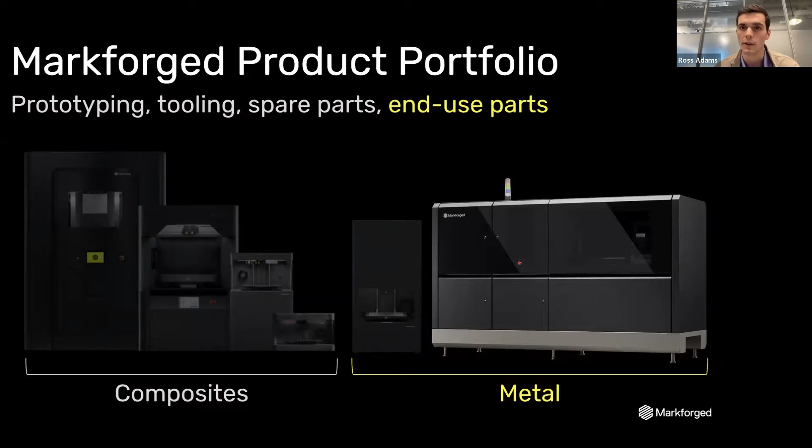So if you're familiar with Markforged, you probably have some awareness of our product portfolio, really well integrated into the FFF segment of the market. What I love about our portfolio is we've really spanned the 4 key application categories: prototyping, tooling, spare parts, and ultimately end-use parts. What we're really going to focus on today is the metal binder jetting segment, the PX100. This was an acquisition we did in August of 2022 from the Swedish company Digital Metal, and we are integrating this company into our portfolio, really targeting that end-use market segment for additive manufacturing.

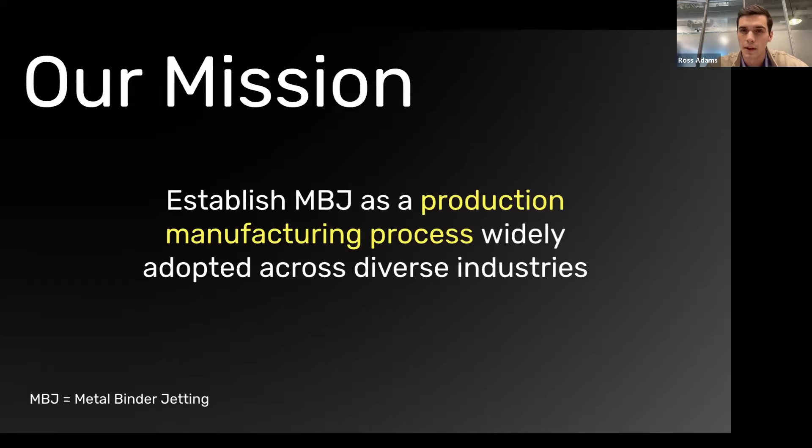So above all else, my mission for this project is to establish metal binder jetting as a production manufacturing process, and to do so having it widely adopted across diverse industries. If we take a step back and achieve this goal, we'll be very proud of what we've done for the 3D printing industry and ultimately for the whole manufacturing industry. We've got to make meaningful impacts and make it a production manufacturing process. This is what we're laser focused on.

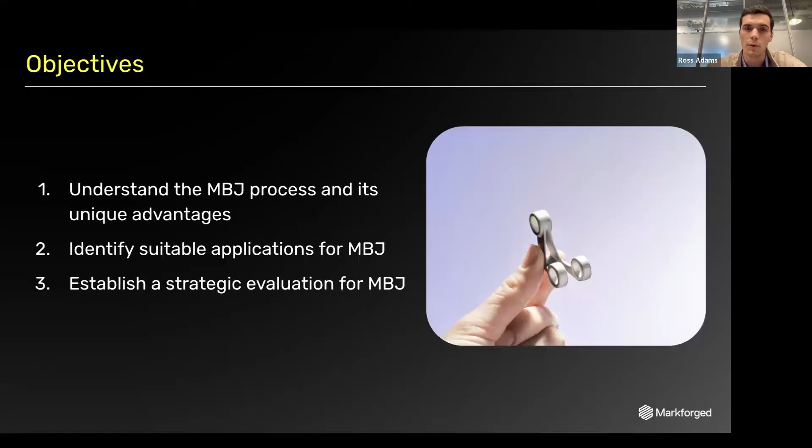So there are 3 key objectives for today's webinar. First is to educate you on what the metal binder jetting process is, how it works, and what the unique advantages of this manufacturing process are. Second is to help you identify what suitable applications are for metal binder jetting based on some characteristics and parameters that we feel are the right fit for the sweet spot. And lastly, we want to put you on a strategic evaluation path: where do you start, how do you evaluate it, and how do you de-risk your investment to make the most value out of this unique manufacturing process? So that's what we've got in store for today.

So why don't we start with the process overview? How does binder jetting work? What better way to do that than sharing this video, Cody, talking through. So what is binder jetting?

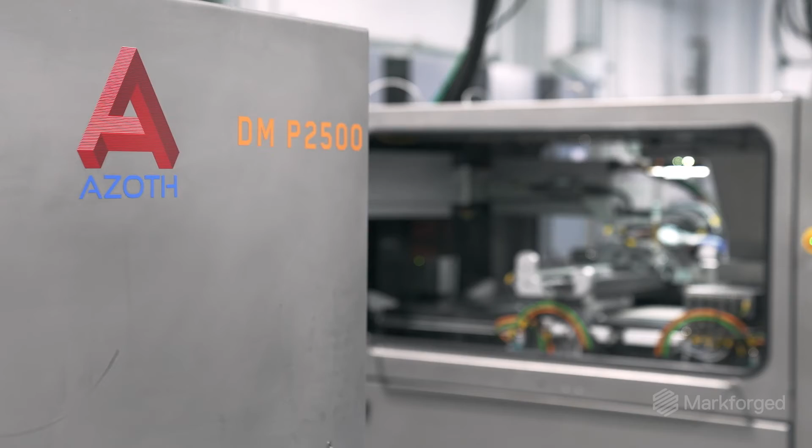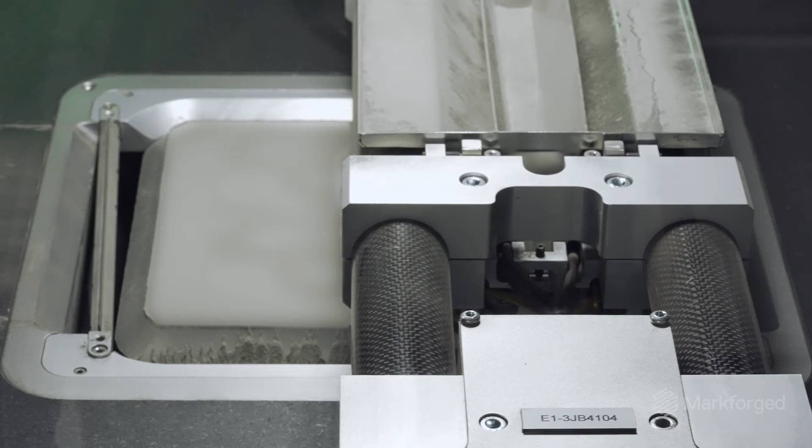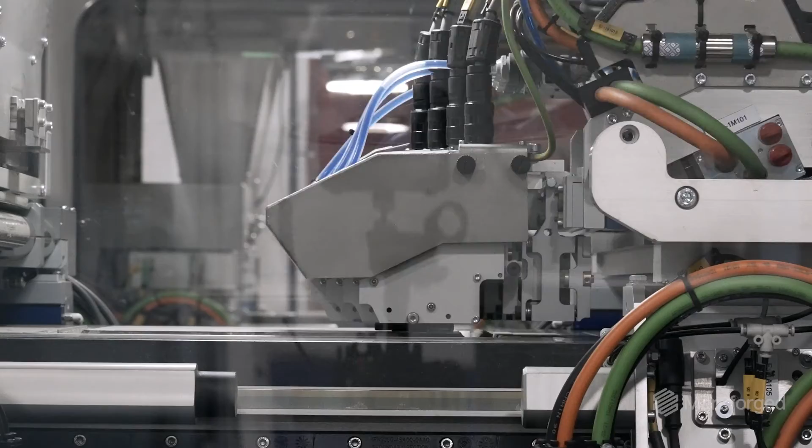The way it works is you're going to lay a layer of powder, in this case roughly 42 microns thick. Then after you lay that layer of powder, you selectively deposit binder in the cross section of your parts, and we'll continue that over and over until we build up the entire Z height of the components.

Once we've printed, we'll go through a curing step, which heat activates the binder. Basically, it locks all the metal powder into place. After that, we'll go through a depowdering step.

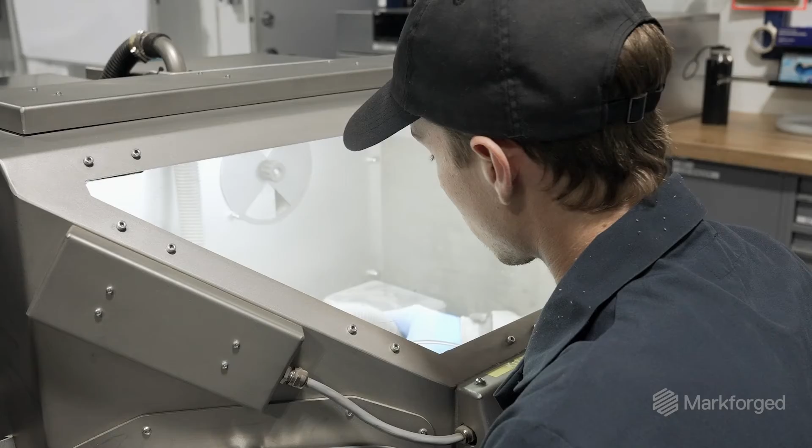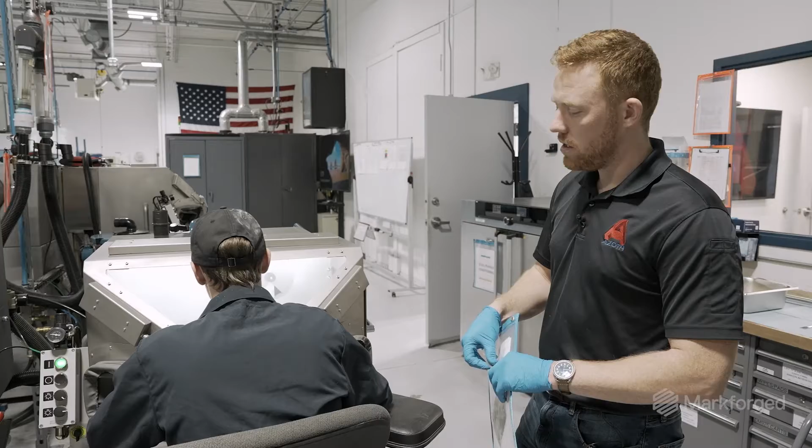So we can check that out over here. During depowdering, we're gonna blow off all the loose powder on the components, then we vacuum that up to be recycled and reused in future prints. And when they're done with depowdering, it reveals a green geometry, which is about 20% oversized in every direction.

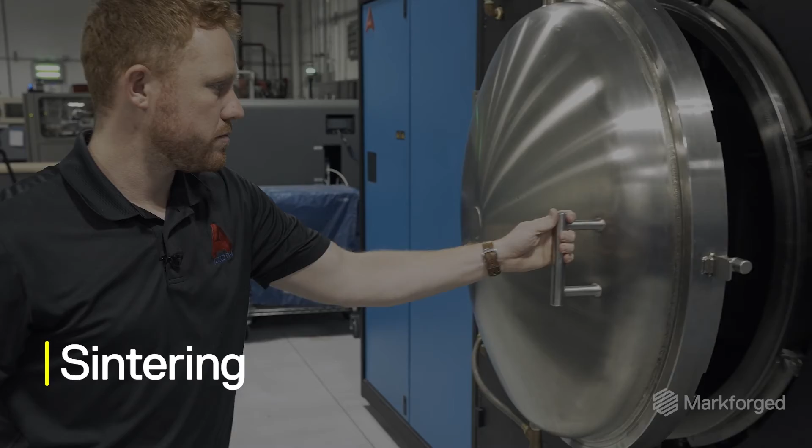We can then take that to the furnace for sintering. Sintering is a thermal process where basically we heat the parts up to just below their melting temperature. The parts will actually densify in every direction, and out comes a fully dense metal part.

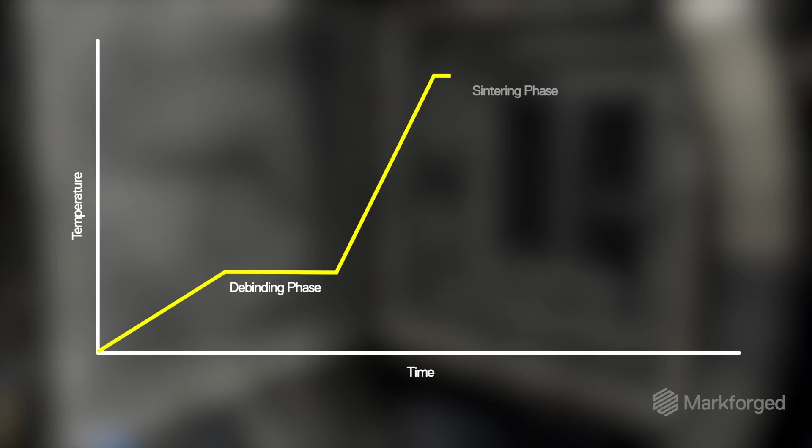It's about a 20-hour cycle. The first segment, we remove the binders from the part. The next segment, we ramp up to near top temperature and hold for a prescribed amount of time. The parts will shrink roughly 20% in each direction, and then we'll cool down.

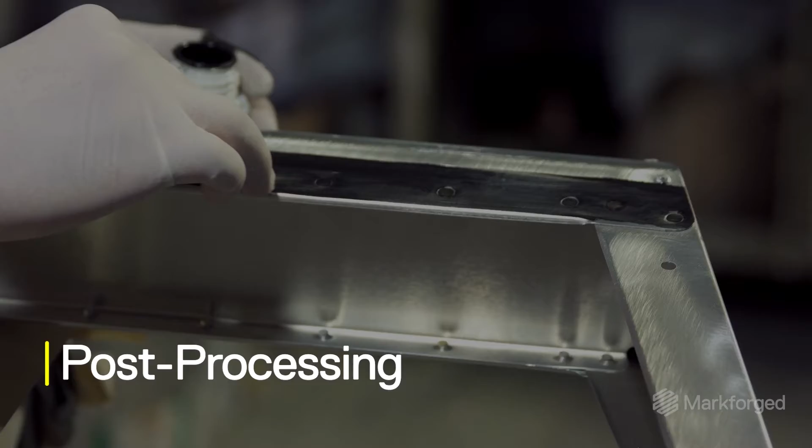At that point, the parts are ready for their next operation. A lot will ship as is, but some of them will go out for post-heat treatments. Some of them will go out for different surface coatings like chrome plating or PVD coating or Cerakoting, and some of the parts will go on to polishing.

Hopefully that gives you a brief overview of how this process works. It's really simplified in the steps of print, depowder, and sinter.

We're standing on the shoulders of a lot of science that's been established with metal injection molding and sintering. And what Markforged is very focused on is building the best printer in the world, putting the best green part into that furnace, establishing the best quality, and getting the outcomes of parts that you can put into production.

We're very proud of this machine. We focus very heavily on the precision machine design, and we believe the tenets here are quality, reliability, and repeatability, the things that you absolutely need in order to go into production and do so in a way that you can launch products and keep the printers running with maximum uptime.

This thing's built around a granite base, linear motors, air bearings. Granite base is very important because it keeps it very heavy and dampened to the forces of vibration. It keeps that powder bed very uniform across its density.

Linear motors, this is a decision rather than using stepper motors and belts and pulleys to translate rotary motions to linear motions. It's how we get really good quality on our parts and have positional accuracy of 1 micron tolerance.

And then air bearings, this is very low wear, very low friction, but more importantly, when we talk about loose metal powder, the risk of contaminating that powder into a ball bearing is going to deteriorate your results over time. So our platform is entirely suspended by air, and that allows it to be running with very high uptime. We have printers in Sweden that have been running for over 10 years now, and they're still making production parts.

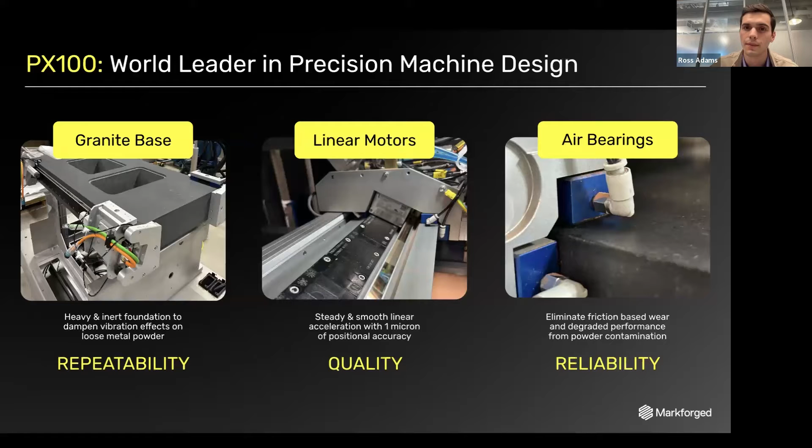So now that we know a little bit about the metal binder jet process, let's talk about the advantages that this process affords.

So when I zoom out, I think there's 4 key things about the metal binder jet process that stick out amongst other types of metal 3D printing processes, all that lead it into this direction of serial production end use parts. So the first one we're going to hit on is the high throughput.

Nothing really competes with binder jet in terms of throughput and speed. And the key reason there is that we're using an inkjet print head and the time per layer is constant. Regardless if you have 1 part or 1,000 parts in that cross section, it takes the same amount of time. We don't have to trace it, we don't have to draw the geometry of the part. So we can produce hundreds or even thousands of parts per day, a really efficient process to create green components.

And then number 2 is cost effective. Because it's a high throughput process, we get really good economies of scale, and that leads to commercially viable cost per part. Very critical when we're talking end use production. And that allows us to be viable in very demanding industries, automotive, consumer electronics, luxury goods, things that you can't launch products unless you have the right commercial requirements that you can achieve.

And number 3 is going to be excellent part quality. The surface finish, the feature fidelity, get really smooth surface finish, about 6 micron RA values, and we can post-process that down to 1 micron to get really mirror surfaces.

And the material properties are isotropic. They're uniform across the entire part. We're able to operate to the same standards of metal injection molding, MPIF 35, and that allows for much more predictability and repeatability of the integrity and the properties of the parts that you're getting.

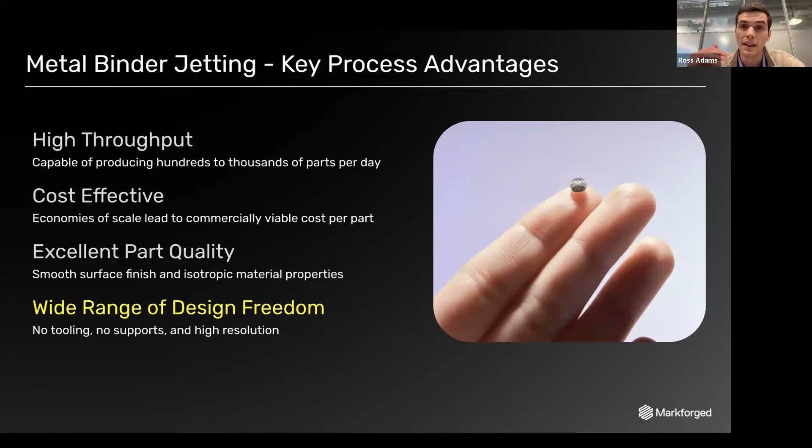So now let's talk about how we identify applications for the metal binder jet process. Just talked about what it's so great at, but there are some limitations there, and we want to really operate in a specific sweet spot.

So if you ask me, Ross, what's binder jet good for? I would tell you this one single sentence: Metal binder jet is ideal for small, complex metal parts in mass production. This is what we're really focused on and what we think we do better than anyone else.

But the engineer in me has questions, right? What is small? What is complex? What is metal? And what do you mean by mass production? So for the next few slides in this presentation, we're going to dive deeper into what we mean by these notions.

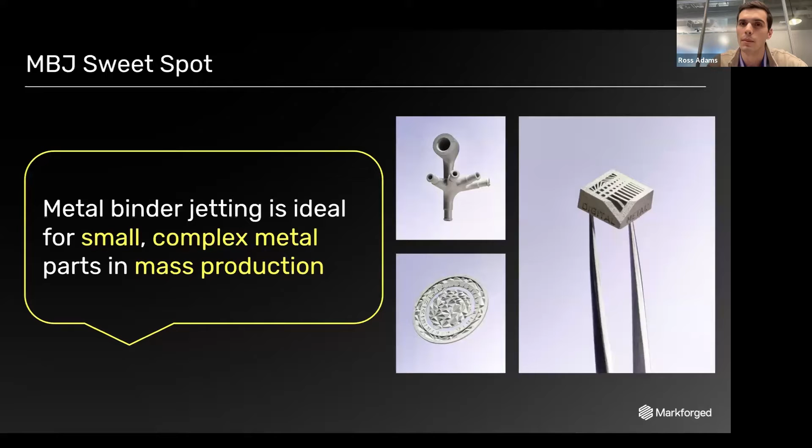So starting with small, I typically say smaller the better. And the reason there is that we get higher throughput. With the higher throughput, the cost per part becomes improved. And even the dimensional accuracy gets better with smaller parts, because we shrink about 20% during the sintering, basically the larger the part, the larger the shrink.

And we get better accuracies with the smaller components. So to get more definitive there, the ideal parts are about 25 millimeters or 1 inch or less in the longest direction of the component. We love these parts. These are really good fits for the technology. You can get really high throughput. The cost effectiveness is very strong. We get really tight tolerances.

Now we can go bigger, and I'd say about 75 millimeters or less is the sweet spot. When we're below that, we definitely have something here that we can go and evaluate and have high confidence that we have the right technology fit for that type of geometry.

Now, when we talk about the limits, the lower limit we'd like to say is greater than 2 millimeters. That's mostly a challenge of the depowdering process and being able to grab the parts and move them around to the next step of the process. We can go a little bit smaller, but 2 millimeters is a good governing factor.

And then the absolute upper limit here, we say is about 150 millimeters. This is going to be a balance of high part cost, loss of dimensional accuracy, need for post-machining. In demanding applications, we've certainly done parts up to this extreme, but it requires a little bit more scrutiny when we think about the business case and if this process still makes sense at these types of part sizes.

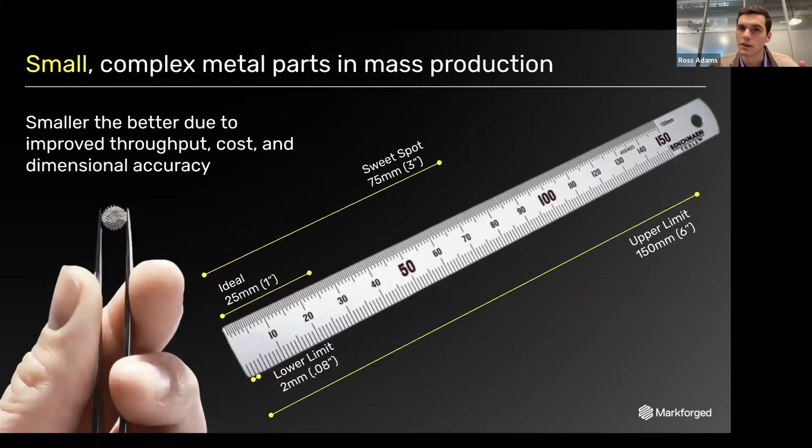Now let's talk about complexity. More complex, the better. Intricate features, either challenging or outright impossible to achieve with traditional manufacturing methods. We often see parts made through CNC machining, metal injection molding, investment casting, and laser powder bed fusion being the incumbent metal 3D printing process. We like the impossible features, things that no one else can do in any other way.

And the type of aspects that we see here are lattice structures, being able to lightweight the component, being able to put filtration designs into the component, and doing that conformal with inside it. A lot of great opportunities for lattice structures, and we can go down to like 200 micron bead thickness on these struts.

Internal channels are fantastic applications for 3D printing, being able to be more conformal to the design and geometry, having smoother transitions throughout, and not needing supports makes these applications really good fits for binder jetting. The next one is consolidated assemblies.

These are great opportunities to take part count and bring it into a single monolith component. I often encourage people not to just look at the single application, but to zoom out and look at the subassembly. Usually when you take that perspective, you start seeing more opportunities to consolidate multiple parts into a single feature and extract more value than otherwise. We really need to engineer value into the parts, and that's where you'll see the best benefits of binder jetting and have the best opportunities.

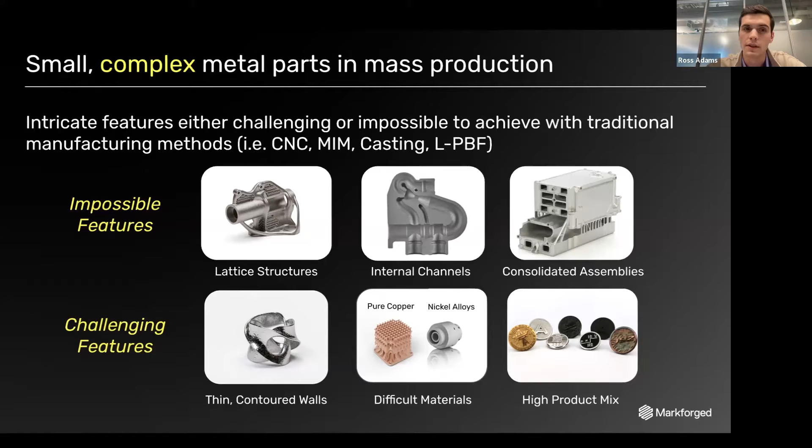Then the last one is high product mix: being able to have a lot of customization, manage a bunch of different SKUs and different types of geometries. Cody's going to talk a lot about this and what they're doing in the automotive industry. But because there's no tooling in this process, we allow customers to scale much more organically and test out different concepts and designs, having a variety of different offerings in their product portfolios. So that's what we talk about when we say complex parts, either impossible or challenging. We like impossible, because it's possible with us.

Okay, into the metal. Basically any metal powder that you can sinter is theoretically possible with metal binder jetting. Oftentimes it's not just the design, but the material itself that can lend itself better to using this type of manufacturing. There's a lot of different materials.

We have some customers that have qualified their own materials because our system has open architecture. But the ones we're focused on today, and that we've already qualified, include some general purpose stainless steels. 17-4 and 316L would be your most popular there, the right blend of strength, corrosion, wear, and heat resistance. We're seeing a lot of traction in those stainless steels. We also have 4140, a low alloy carbon steel, a little bit tougher of a material.

In the high performance realm, we've got pure copper, about 99.9% pure, with very good thermal and electrical conductivity. Antimicrobial applications are also very interested in that, as well as titanium for very high strength to weight ratio and very good corrosion resistance, for very demanding applications.

Super alloys are very exciting, particularly for aerospace, oil and gas, and those types of industries. We have two different flavors of Inconel, 625 and 718. We're also very excited about this MAR-M247 material, because this is something you can't actually use in laser powder bed — it doesn't like to be welded together — but it lends itself very well to the sintering process.

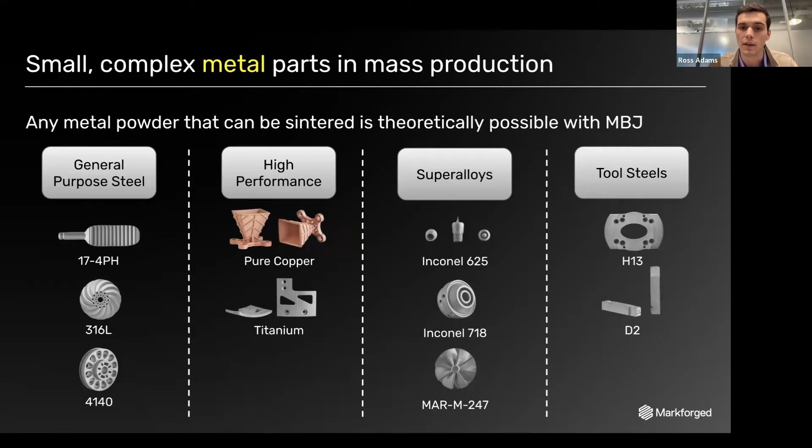And then finally, two different types of tool steels, H13 and D2. We're seeing a lot of applications for punches and dies, where hardness is really required and critical, and we have tool steels to address those applications as well. So about 10 materials on the screen here, and we're constantly evolving and adding more. We'd definitely love to hear feedback from customers about what materials we're missing.

Now into mass production. The mass production aspect really depends on the size of the part — that's your governing factor for how many parts you can put into a build box and route through the entire process. I made this chart to articulate: if you have a bounding box of a certain size component, and you have one PX100 operating at about 80% uptime throughout the year, you see the million parts per year threshold come in at about a 10 by 10 by 10 millimeter cube. We can produce 2,600 of those a day — really high throughput from that perspective.

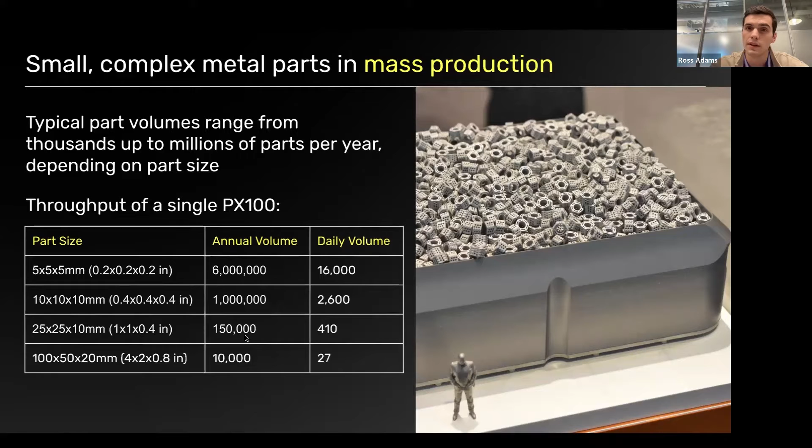Of course, everything scales linearly — as you add more printers, you can increase that throughput and chase those types of volume requirements. But again, smaller is better, as you can see from the annual volumes. And of course, cost corresponds with this because of equipment amortization at high volume economies of scale.

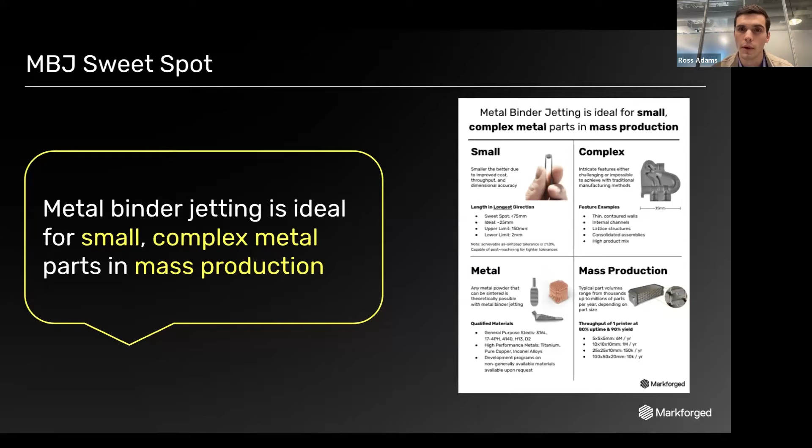So once again, metal binder jetting is ideal for small, complex metal parts in mass production. We made this very nice one-pager that we'll follow up after this webinar and provide everyone as a reference piece of material, because if you have a need for small, complex metal parts in mass production, we really feel strongly that you should be looking at metal binder jetting and evaluating whether there are opportunities that you can utilize this process and extract new types of value through engineering, design, and ultimately innovate inside your products.

So what about strategic evaluation? We talked about how the process works and some of the equipment that you need. A question I often get asked is, should I make parts or should I buy parts? It really comes down to where you're at in your additive journey, what type of risk tolerance you have, and how you're trying to enter these opportunities.

So when you have a need for small, complex metal parts, we have two different paths here. If you're ready to implement metal binder jetting, but not ready to make the investment, we have contract manufacturers like Azoth, who are really great partners for you to go on this journey, start getting parts made, and bring them into applications, while ultimately leading towards the investment of the machine when it comes to ROI analysis.

Of course, I'm here as well to help you adopt the technology. We're not just here to sell you printers, we're here to sell you a solution, and ensure that your success is realized through a training curriculum and service and support on top of the world's best metal binder jet printer.

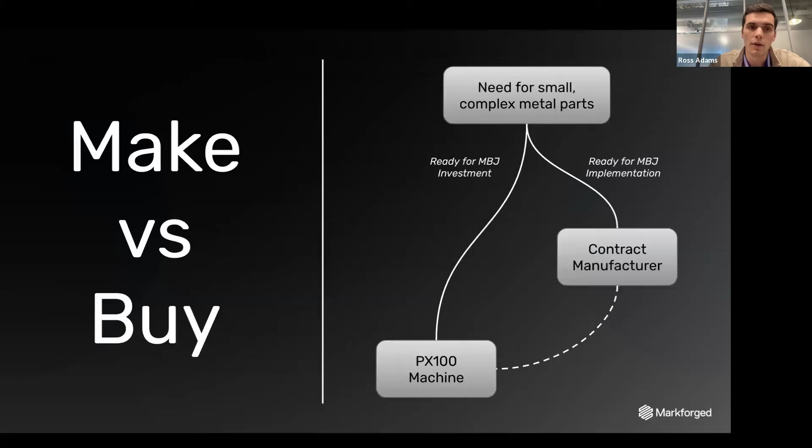So this is a concept that we talked a lot about, because it's very important to go at the customer's pace. And I want to hand it over to Cody to talk a little bit about the way Azoth partners with their customers and what some of the successes they've had within their binder jet operations.

Awesome. Thanks, Ross. Great overview so far. Really enjoyed that. Helpful. Wish I would have started with that information myself. So, a little background on Azoth.

We are based in Ann Arbor, Michigan, and we focus on sinter-based additive manufacturing, binder jetting. We also have a leading digital inventory solution. We call it Take One, Make One, Tomo, where we help industrial manufacturers set up 3D printing in their facilities and utilize a digital inventory that can be printed on demand. So we support over 40 different polymers in addition to our metals offering.

Our primary industries that we are making metal parts in today are automotive, medical, defense, and the luxury goods segment. And I think really what makes us different than a lot of other companies in the 3D printing space is our focus on manufacturing. We're a manufacturing company; our medium of manufacturing just happens to be 3D printing. We're focused on a production part approval process, going through the drawings, setting up tolerances, GD&T that's specific to our process, and helping our customers launch serial production components.

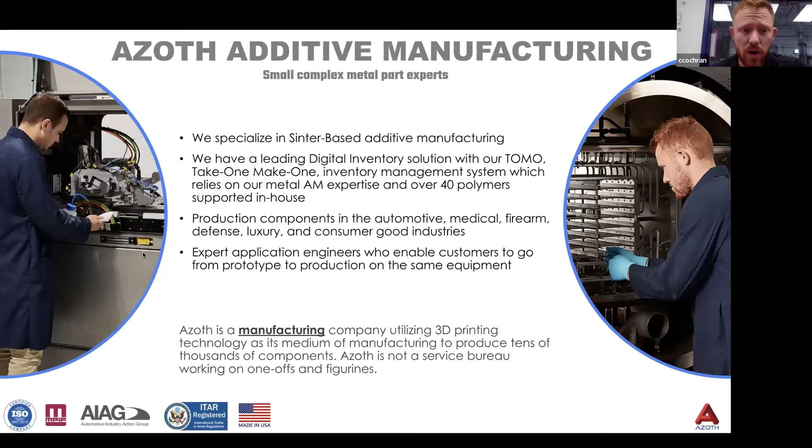We're not a service bureau that's going to just take your file, quote it as a one-off, print it, and ship it to you. We're really going to go through how do we launch this new product and go into serial production. That's our focus. Next slide.

I'll talk a little bit about our path to share how we got into sinter-based additive. If you're interested in adopting it in your company, it may be helpful to know our path to get into this as well. With our Tomo digital inventory model, we supported over 40 different polymers, and most of our customers' feedback for us was, we love this business, but we wish you could do it in metal. We want tool steels, we want stainless steels. And so for Azoth, we chose to utilize binder jetting in a relatively high product mix at lower volume environment for the tooling, jigs, fixtures market.

We felt that additive was totally ready for the tooling, jigs, fixtures market since the 2017 timeframe when we started it. So when we launched binder jetting for this market, we really became one of the first contract manufacturers in the US that is vendor neutral, utilizing binder jet for contract manufacturing for a variety of customers. And that was a really good place to start. You can see a lot of the pictures along the right there are gripper fingers and barn details, part locators, and more traditional designs that you would use in tooling, jigs, fixtures.

Used to be primarily machined. As that evolved and we developed a market presence with our technology, we found a lot of customers coming up with ideas for what I would call end-use products. And we made that transition from tooling, jigs, fixtures into higher volume components, customers that needed hundreds of parts at a time, primarily for the rapid product development market.

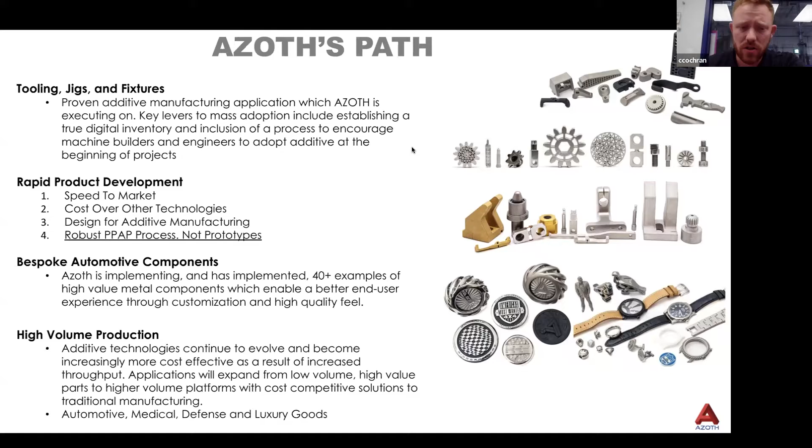And now today, Azoth, 70% of what we're focused on is our serial high volume production. Repeat customers that we have contracts with, that we owe parts every month, that we've completed a PPAP package, gone through their corrosion testing, gone through mechanical testing, part specific testing, certified the process, and we make parts for them every month. That's really the best use of this technology, making parts that are difficult or can't be made with other technologies, and doing that at scale. So I'll share a few of those examples throughout this slide to get people's thoughts going.

The first component that I'll share is we actually launched the first metal 3D printed part for a production vehicle with General Motors. That was on their Cadillac Blackwing. It's a tribute to the last manual transmission that they'll be manufacturing. So we actually did this 316L stainless steel shifter insert. It's high polished with a brushed finish across it, so very high detail, a tribute to the Blackwing itself. And that was an awesome component.

It's definitely more of a cosmetic component. It's vehicle jewelry is the way I describe it. But what really was a milestone for Azoth at the time is that it still had to go through a full PPAP process. We still do very advanced corrosion testing for the automotive industry, dimensional layouts, going through your PFMEAs, your DFMEAs, and really making sure that you can make this product time and time again for the production length of that vehicle.

So when binder jetting passed that, it really opened up the doors for many other applications at Azoth. Today, we have over 40 parts with a full PPAP, including some safety critical components.

And we're doing that across 12 different tier ones and OEMs throughout the automotive industry, which is really awesome for me, and I think awesome for the industry, because when these tier one automotive companies are auditing the process and bringing new process engineers with different lenses and questions as they go through our shop, to build trust across that many companies and say yes, your parts are certified, we can make them in production, I really think it speaks to this being a scalable production ready technology.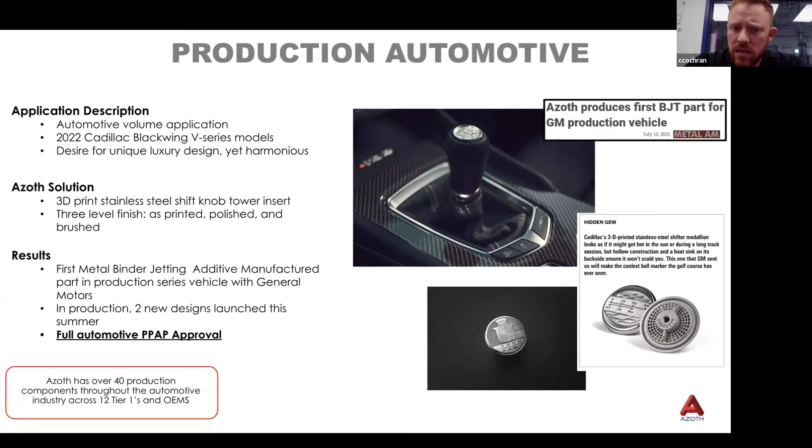So I'll go through some other applications. Some of these are aftermarket, most of these are aftermarket automotive, not necessarily the tiered automotive supply chain going direct to OEMs, but it'll show some mass customization and some advantages we can do.

Like these Jeep shift knobs, we designed in the Moab Mountains background into them, so they have a nice contoured background, playing on the benefits of additive. High polished 316 stainless steel with a textured background in the back, so we have multiple different versions that we enable our customer to sell online for the transfer case and shift knob.

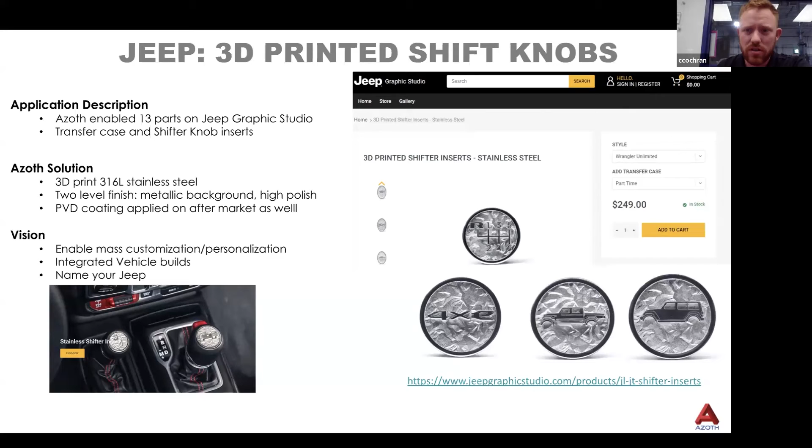If you go to the next one for me, Ross, we've done some really cool limited edition runs with binder jetting technology, Jurassic Park serialized editions, and this shows just some of the fidelity. You can see the resolution we're able to get on the part, but it also shows that ability to help customers enable mass customization for markets like Jeep owners who really appreciate that.

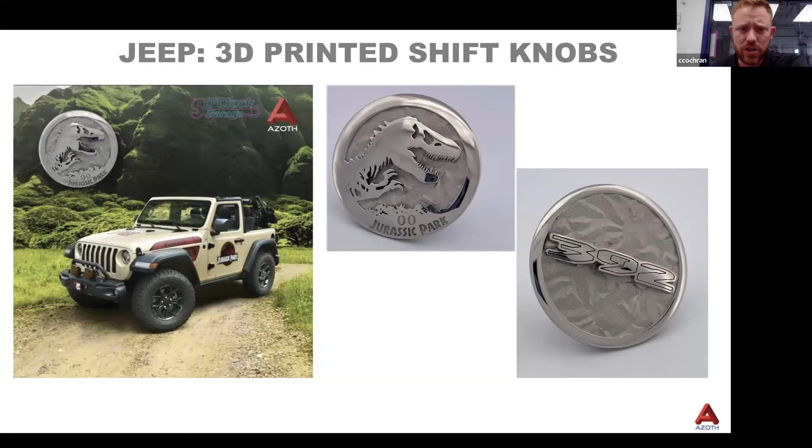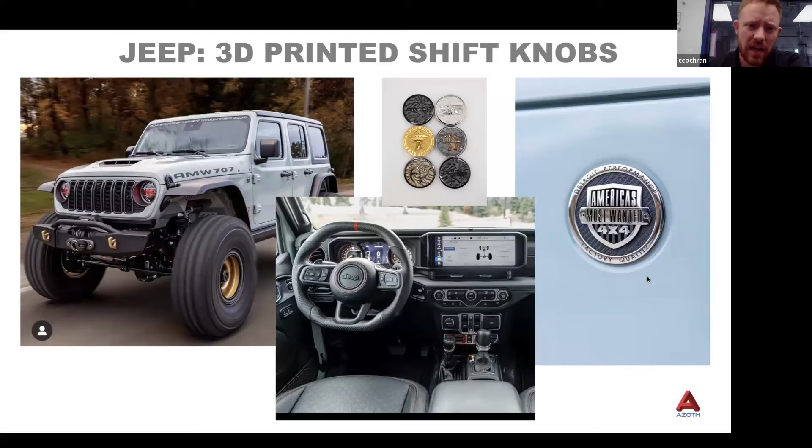Some further examples, you can see more variety where we are able to apply different kinds of surface coatings. Common surface coatings for cosmetic components would be PVD coating. That's how we get the gold look, or the really shiny black look on some of these components. We can also utilize Cerakote, which is a really durable, robust surface coating, to get that black background you see on this component with a high polished front surface. So really bespoke applications, but applications that really are adding some kind of value to the vehicle.

Some of my favorite ones, we had this horn button on the carbon fiber steering wheel. It won at SEMA's Battle of the Builders with the Ring Brothers group. But starting with a sketchboard and all the ideas, Azoth is able to help our customers walk through the design ideation phase and get physical parts in hand to see the variety, and then actually make these into production. So you make your initial prototypes, customer selects their favorite, and then you're able to launch these. Lots of different options here.

This is some aftermarket perspective, but what I'll say is that anywhere you touch, if it's a button, a knob, a handle, we are really doing some awesome things with stainless steel in that market.

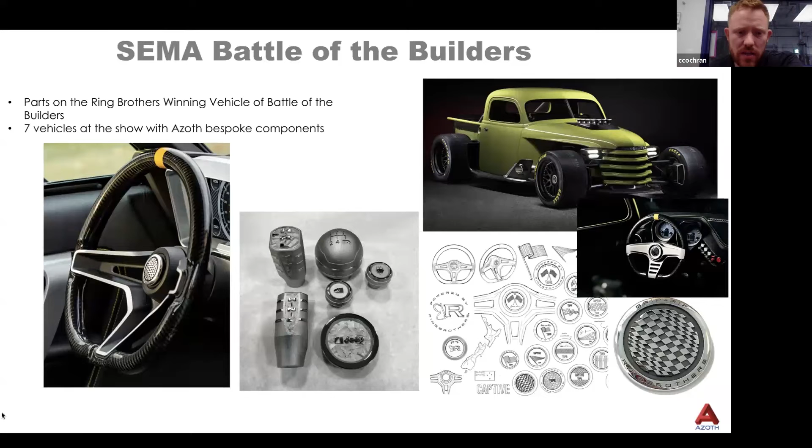Outside of the automotive industry, another big industry for Azoth is defense, working on really complex components like this fluid matter exchanger. This won the grand prize in industrial motors and controls at the MPIF conference last year. And what I love about this component is we helped the customer consolidate what used to be 40 different machined components that got brazed together downstream into one additive manufactured component.

And so that was a really awesome milestone to see for Azoth as a company, to be able to help a customer consolidate 40 different pieces, which is a pretty large supply chain and assembly process to put those all together, and then to really make a robust design where it's now one 3D printed component. We're able to do multiple internal channels, internal filters, internal features that previously you really couldn't machine. Obviously, you had to make it 40 different parts and bring it all together.

Very thin-walled component. This is actually about 90 millimeters tall, so it's a rather large component for binder jetting. And we're going down to M1.2 threads in some areas that we're actually able to print into the component. So that was a huge milestone, and you can see the evolution as you start to adopt this technology, working with tooling, jigs, fixtures, what might look like 3-axis machined components, and then you go to what look like 5-axis machined components, and then eventually you get to really what I would say is our holy grail, where it's designed for the process and brings a lot of function and value to our customers.

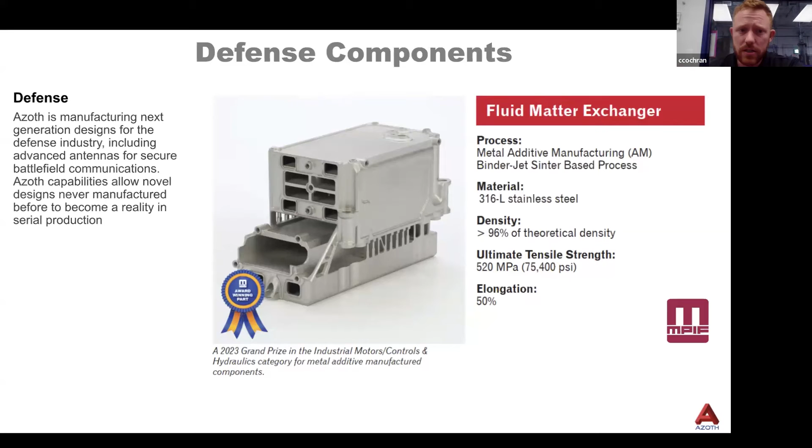I'll close on a question I often get. A lot of questions from new users of the technology, from people looking to get parts for the first time, and the questions I had when I started in binder jetting really boil down to: how do you build trust? If you're going to use new tech that's new to your organization, how do you build trust in it?

One thing I like to share with people is that we have an industry standard for our materials, MPIF 35, that breaks out the mechanical properties and the micrograph. This is old science based on metal injection molding, and we're applying new technology to create the green parts. It's nice to have an industry standard to look at mechanical properties and share that with customers.

We utilize the same quality management systems. Azoth is ISO 9001, and we look to our aerospace work, AS 9100, and medical, ISO 13485. As suppliers put those traditional systems in place, that's what we're operating to as well.

If you compare us to a known technology like metal injection molding, you can see the breakout in that chart. We're operating to the same mechanical and chemical property standards, metallurgical microstructure. It looks the same - if you're working with your metallurgist, they'll look at a micrograph of MIM and binder jet and know exactly what they're looking at. That's not always true with other forms of metal printing, so that's really nice when it comes to binder jetting.

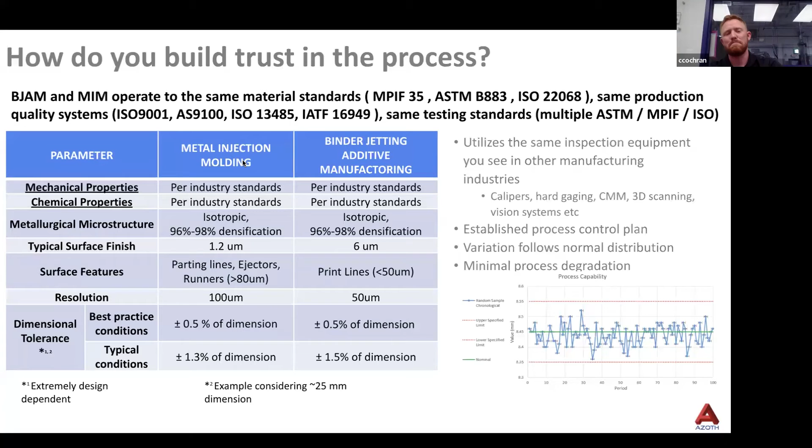So what we'll finish with is a question I always get asked: where do I start? I'm not really here to talk about printers, I'm here to talk about applications, and my mission is to make this a production manufacturing process. What we've architected in partnership with Azoth is our Start Smart program. The headline is: start smart with quality parts that are production ready. It doesn't matter how many parts we can make if we can't make them at quality - we want to deliver something production ready, not just onesie-twosies, but things ready to scale over time.

So there's 4 key steps to this program. It starts with identifying the applications. We gave you this framework, the small complex metal parts in mass production. Send us 20 parts. We want to boil that down to what are the top 5 parts? What's the top 1 part?

Help you redesign that component to lend itself better to this process and start engineering that value you couldn't get otherwise. Once we identify those applications and feel good about the path we're on, we're going to validate it for you. We want to make sure that your dimensions are stable, that your chemical composition is withstanding the environment, that the cost of the component to produce with the metal powder and the binders and the sintering is going to be

commercially viable for the ultimate goal of going into production. Once we achieve that, it comes into a make versus buy analysis. If we feel like the best place for you to start is to just purchase components and partner with Azoth, perfect. Cody's going to provide you a quote at production, and then they're going to start launching it. If we feel like it makes more sense to bring this technology in-house, control the process, and build up that expertise, I'm going to provide you with a proposal. I'm going to show you exactly what we're putting into that package and why we think this is the right equipment that corresponds with your requirements. And then we're going to load that with services and support, as well as training, to ensure that your team members are experts in this process and are able to operate it into production.